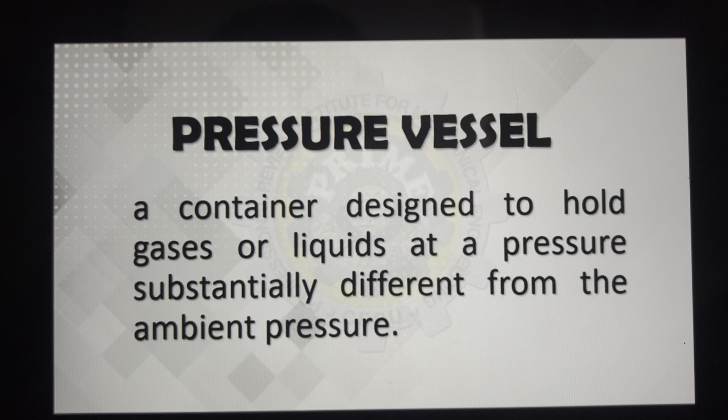Unahin po natin si pressure vessels. When you say pressure vessels, those are containers designed to hold fluids having a pressure substantially different from the ambient. Sa pressure vessel po natin, meron tayong dalawang uri: thin-walled, manipis, at makapal, the thick-walled pressure vessels. Meron po tayong pan-check para masabi natin thin-walled ng ating vessel: the thickness of the vessel with respect to the inside diameter should be less than 0.07. Yan po yung susundin natin.

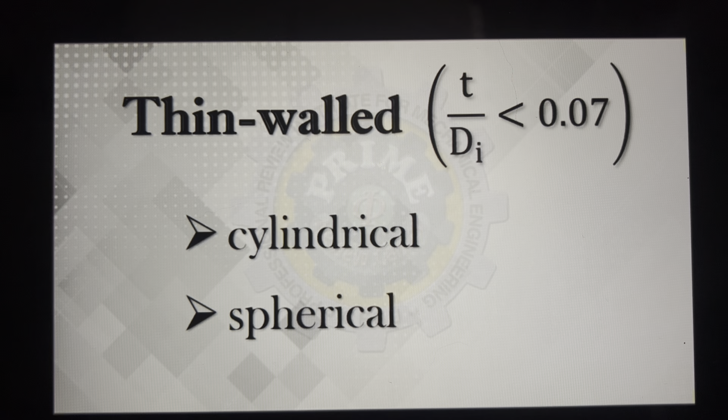Meron tayong dalawang uri ng thin-walled pa: the cylindrical pressure vessel and the spherical thin-walled pressure vessel. Magkaiba po tayo ng formula, so daanan lang po natin yung derivation niya. Mabilisan lang naman po ito.

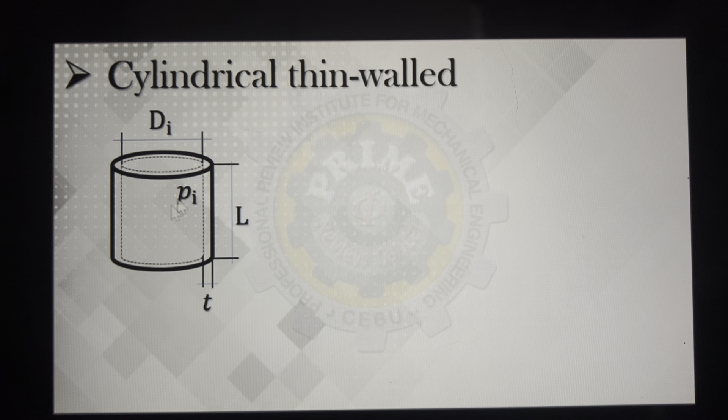Sa cylindrical thin-walled po, for example, this is your cylinder having the thickness, of course. This is the inside diameter, this is the thickness, and this is the height na tatawagin nating length, L. Height or length, taas po. And you have the pressure inside, which is substantially different sa surrounding natin.

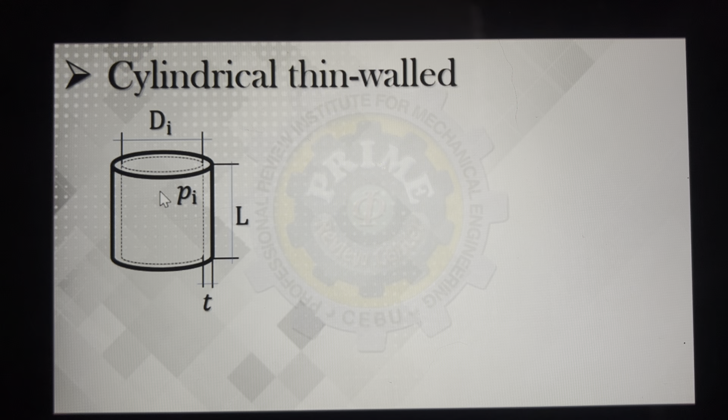Since iba yung pressure natin sa loob, normally malaki kumpara sa labas, ang tendency po ng pressure is kumawala, so possible pong masira yung ating vessel. Imagine this vessel kung mapupunit po siya dito sa kulay blue na line. Meron po tayong stress na nabuo dyan, tawagin nating ST. Ito po yung ating cross-sectional area once na nasira yung ating vessel dahil sa force na tumulak sa kanya.

Sabi natin, stress is force over resisting area, yung pumigil. Sa thermodynamics po, ang pressure naman ay force over area rin, pero ang pinagkaiba lang nila, this is area of application, kung saan tumama yung force. Tumama yung force natin dito sa pakurba, pero medyo mahirap computing yung kurbadang area since lahat naman yan tinatamaan. Ang ginagawa po natin, ipoproject natin yan.

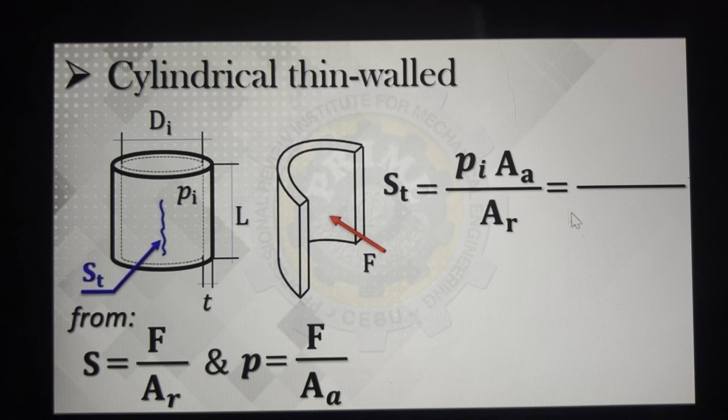Pagsasamahin ko na itong dalawa, stress sub T is equal to force. Galing naman sa pressure, ang force ay inside pressure times area of application over the resisting area. Expand lang natin: you have the inside pressure. Ang area of application, yung tinamaan, ipoproject lang natin siya para maging rectangle, itong blue, so yun po ay magiging inside diameter times the length. And the resisting, yung pumigil para ito ay mapunit, ay ito pong dalawang nasa gilid, ginawa natin green, so yun po ay dalawang thickness times the length.

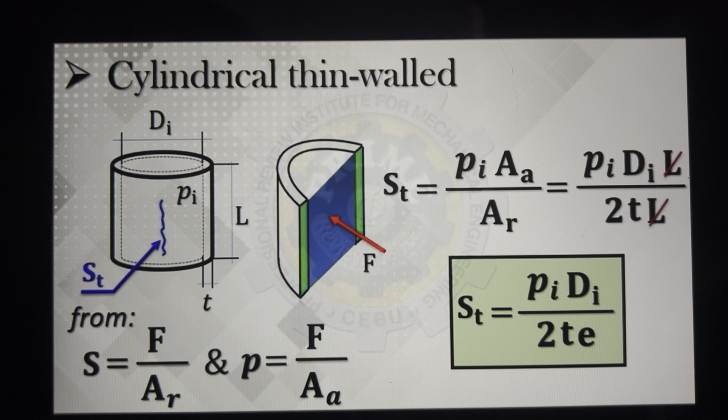Magka-cancel out po yung length. Kaya ang formula ng ST natin is inside pressure times inside diameter over twice of the thickness. Of course, pag may binigay na joint efficiency, divisor po. Pag walang binigay, make it 100%. Sige, so yan po yung formula natin sa ST. Mamaya ko na po sasabihin yung meaning niyan.

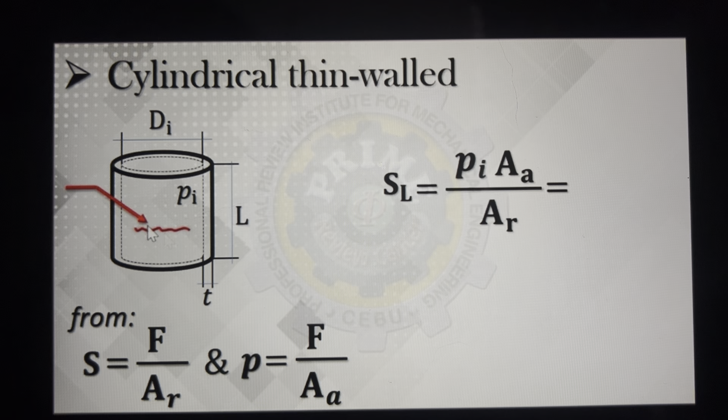Meron din po tayong SL naman. Ano pala yung SL? So ito pala yung formula. Pero yung ating vessel, imagine natin if dito masira naman sa kulay pula na to, ang mababago lang dyan is yung cross-section natin. Ito po yung mangyayari, ito ang ating force.

Siyempre, ang magiging area of application, yung bilog na maliit, so yun ay pi over 4 inside diameter squared. At yung resisting area natin, itong green, pero yung ginagawa dyan, pupunitin mo yan dito, then i-stretch mo, magiging yung green, imagine niyo na in-stretch mo na rectangle. Kaya yun ay perimeter pi d inside times the thickness, yung kapal niyan.

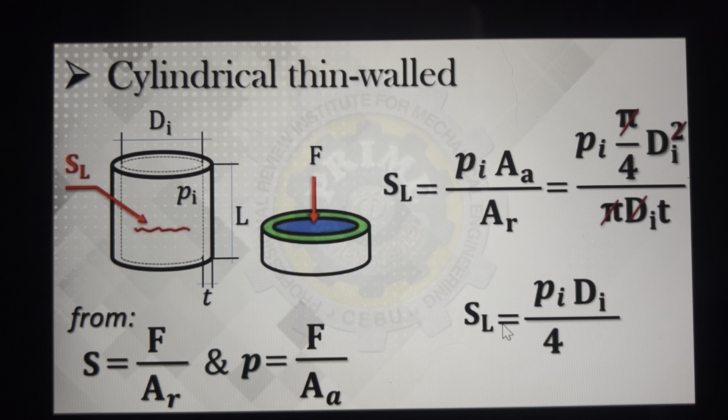Kaya mag-cancel out po ang pi at isang inside diameter, magiging SL is pi di over 4t. Of course, efficiency is divisor.

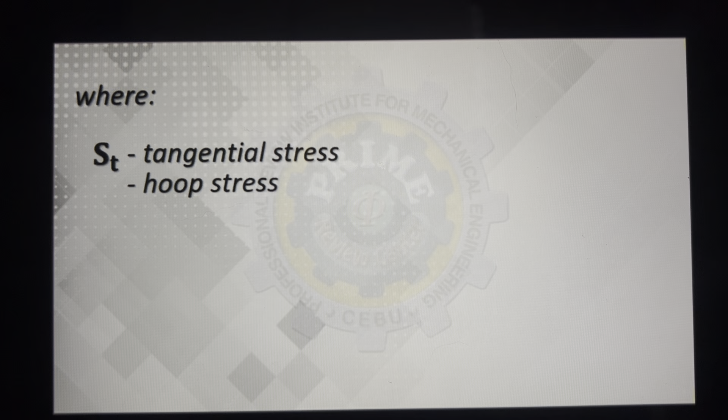Ito po yung mga meaning niya. Pag sinabing ST, yan po yung tangential stress, that is also the hoop stress, the girth, circumferential, the maximum stress, or simply the stress. Yun po ang ating ST na tinatawag. You have SL, which is the longitudinal or the minimum stress.

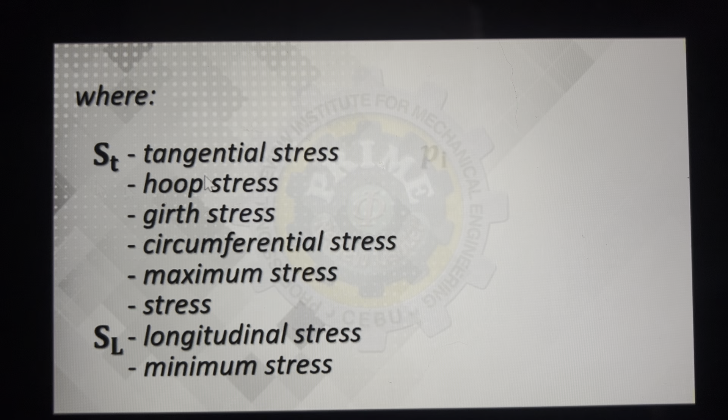Sa mga problems po natin, ang design natin is laging based on the maximum stress, worst case scenario kumbaga. So pag walang tinanong sa problem kung anong tinatanong na stress, that is automatic, di tangential, ST ang kukunin. And of course, you have the inside pressure, the inside diameter. Sa diameter pala, pag walang binanggit about the problem, inside na automatic ang ating assumption. You have the wall thickness, and of course, you have the joint efficiency natin.

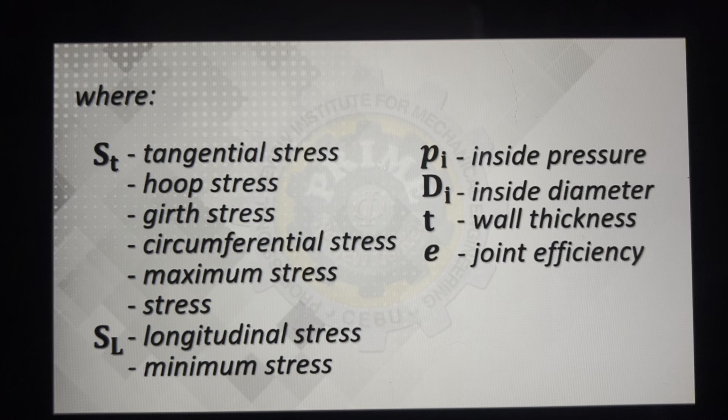Sige, so next natin is spherical naman po.

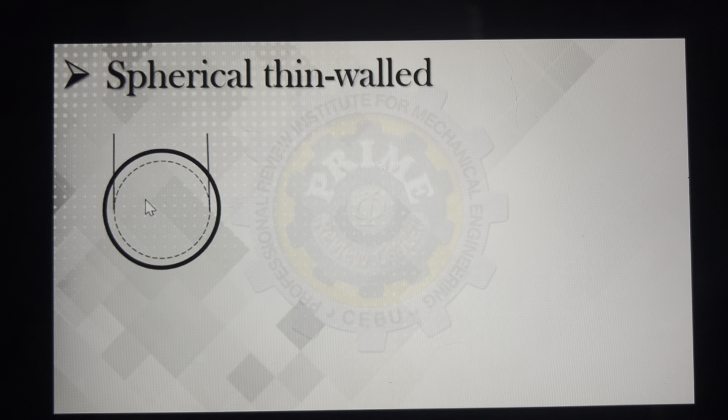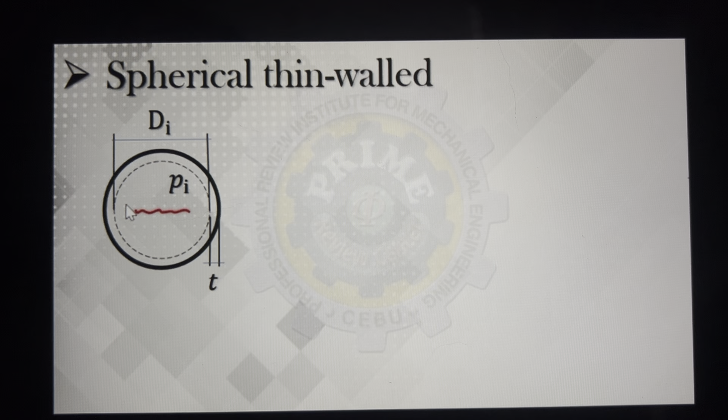Thin walled vessel. So sa sphere natin, ito po yan ay kapal, syempre. So ito yung ating inside diameter, and this is the thickness. Imaginein po natin, due to the pressure inside, possible masira yung tangke. So pumutok, kumbaga, pwedeng sa direction na to. You have your SL, longitudinal, and pwede rin dito sa blue, ST.

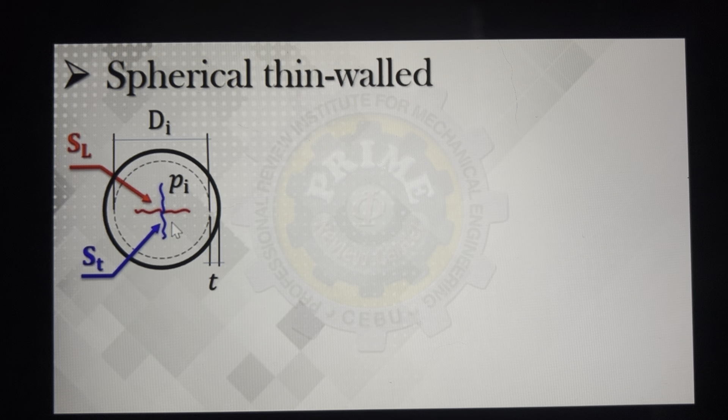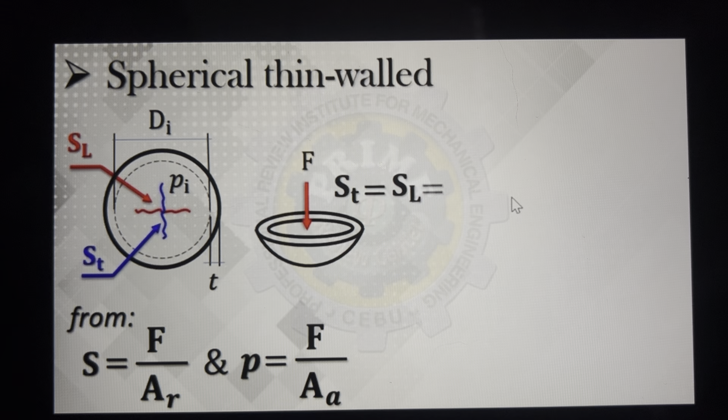Mas mabilis lang yung derivation ng formula sa spherical kasi imagine kung kunin ko yung cross-section dito sa tangential at sa longitudinal, parehas lang kung ganito. So ibig sabihin, from stress again, and pressure formula, nag-come up tayo kanina sa ST, equal ngayon si ST at SL, obvious naman. So sila ay equal sa derivation natin na inside pressure, area of application, over the resisting area.

Ang mababago lang, the area of application ay itong bilog na maliit, kaya pi over 4, Di squared. Ang resisting area itong bilog na may butas na green, pero ang ginawa ulit, kagaya kanina sa cylindrical, hatiin yan, i-stretch, magiging rectangle, so circumference, pi Di times the thickness. Magka-cancel out po yung pi at isang Di, so ang ating stress for spherical is parehas lang sa tangential at longitudinal na PD over 4t, may efficiency denominator.

Pag mas maliit po ang stress, mas malakas yung ating vessel. Kaya mas malakas ang spherical sa cylindrical by twice, kasi ang denominator nito ay 4, ang denominator ng tangential ng cylindrical ay 2. Okay, so let's try this problem.

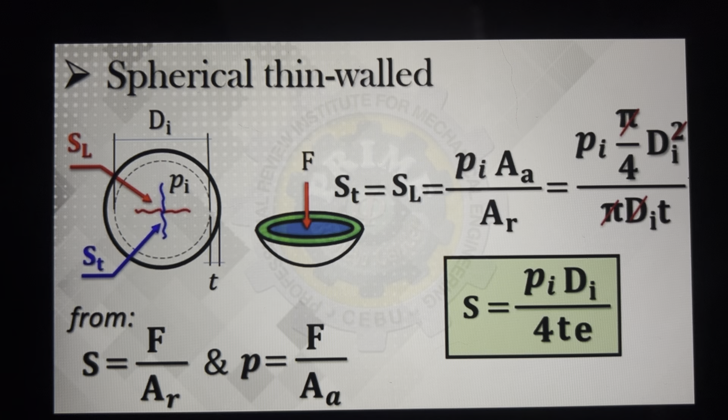A thin-walled cylinder is 15 inches in diameter, having an internal pressure of 150 psi. The wall thickness is 0.125 inch. Find the induced stress.

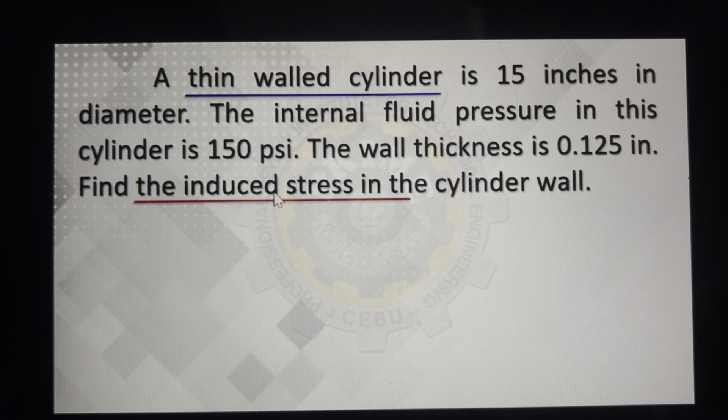Sa thin-walled pressure vessel po, induced stress or simply St is PD over 2te. Direct sub naman ito. So you have your 150 psi, inside diameter is 15 - again, pag walang binanggit sa diameter, automatic inside yan. You have twice of the thickness given. Efficiency, walang sinabi, so that is automatic 100%. Sa design, pag naka-English units, tandaan lang lagi: psi, inches, then pound force.

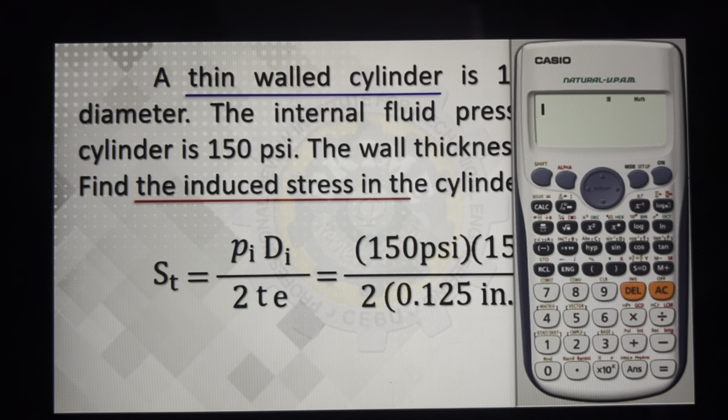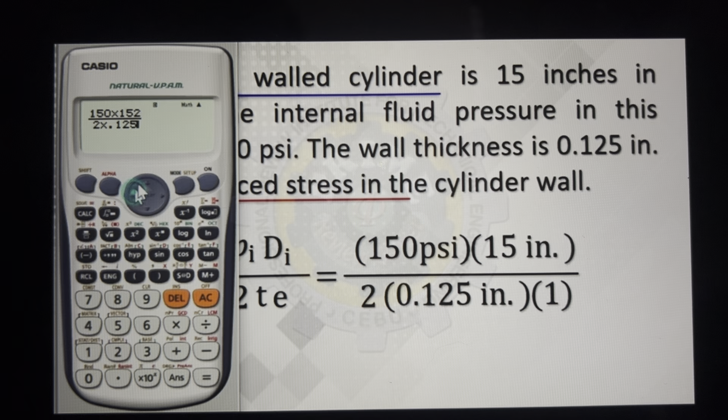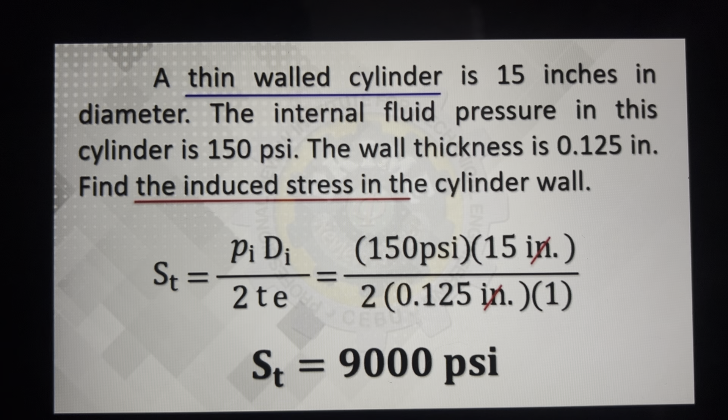Okay, labas lang natin si calcu. Ililipat ko lang dito si calcu. Ito type na natin siya: that is 150 times 15 all over twice of 0.125. Wait lang, may mali tayo na pindot. Okay, 15 lang to. So lalabas po ay 9,000 psi. Ganun lang po kasimple yan, direct sub lang. Okay, next number.

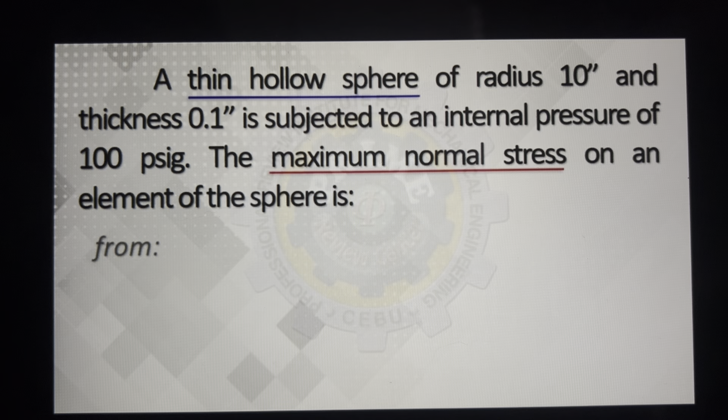A thin hollow sphere, radius 10 - tandaan, sabi dyan radius of 10, walang sinabi, so inside na. Thickness of 0.1 inch is subjected to an internal pressure of 100 psi gauge. What is the maximum stress on the element of the sphere? Pag sphere po, over 4 tayo. Direct sub pa rin yan.

You have your inside pressure of 100 psi. Okay lang kung gauge dahil gauge naman talaga ang nasa loob ng cylinder. You have the diameter, twice of the radius 10, times 2 since this is a hollow sphere. Then thickness is 0.1, efficiency not given, 100%.

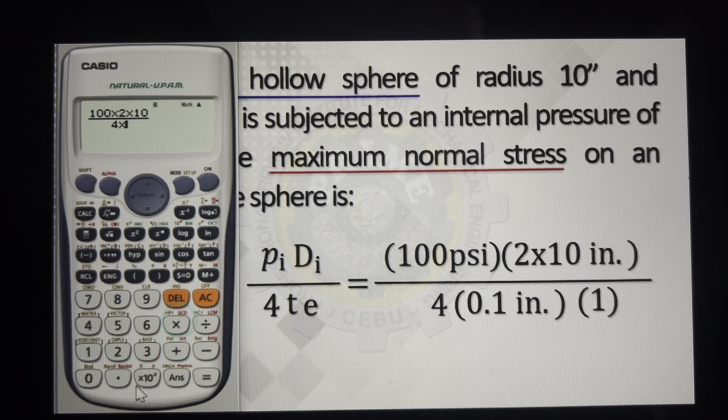Okay, i-type ulit sa calcu natin yan. That is 100 times 2 times 10, pwede yan kay calcu, divided by 4 times 0.1 equals natin 5,000. English unit, psi. Ganun lang po yan. Next.

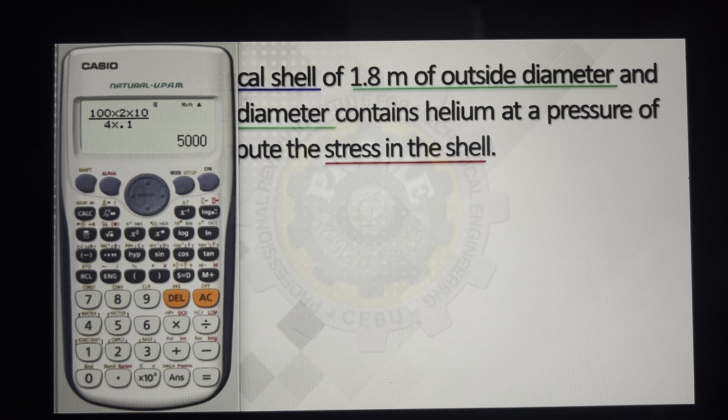Spherical shell, binigyan ka ng dalawang diameters, outside, inside, makukuha natin si thickness. Sa mathematics, ang thickness natin ay - okay, paano ba lumabas yung value na yan? Paano ang solution natin for thickness? Kung naalala pa sa math, sir, yun po ay difference in diameters, 1.8 minus 1.725, i-divide mo ng 2. Doon po nanggaling ang 0.0375, that is in meters.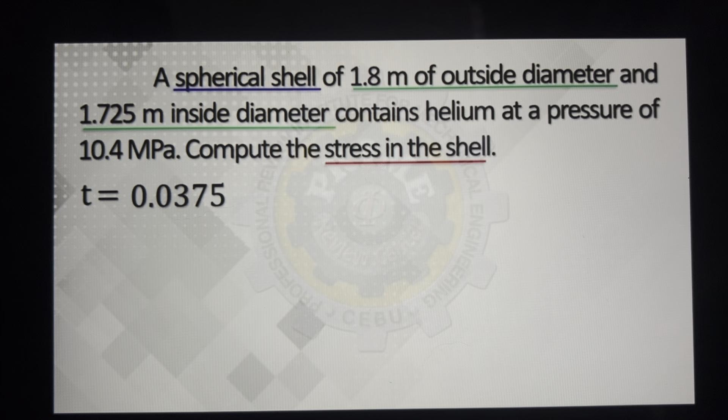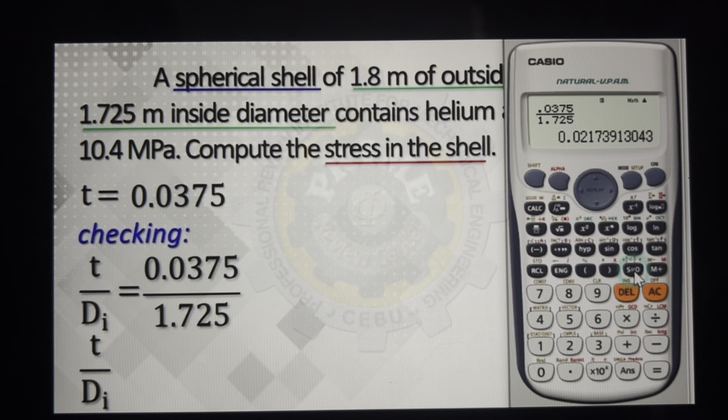Walang sinabi ditong thin or thick, so pwede natin ma-check agad using thickness over the inside diameter. Ito type natin yan: 0.0375 over the inside diameter 1.725, ang lumabas dun ay 0.02. Okay, so 0.02 is less than 0.07, so thin walled yan. Lagi po nating i-check pag walang sinabi sa problem. So thin walled pressure vessel, cylindrical, spherical, kaya over 4, direct sub yan.

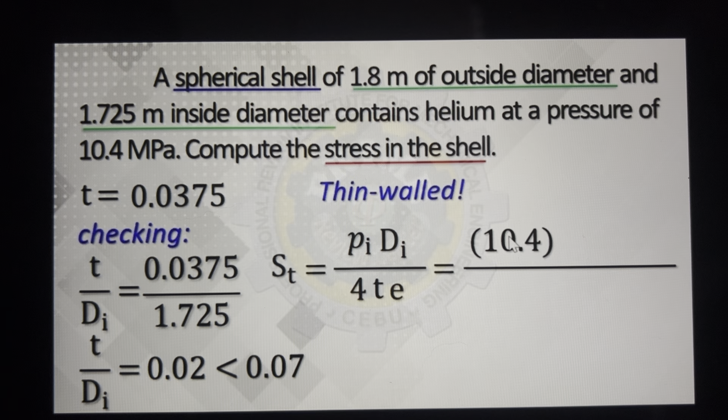SI units tayo. Sa SI units, megapascal at saka millimeter sana, pero dito naman okay lang na meters kasi magka-cancel out yung unit ng diameter at thickness, same ng unit ng stress at pressure. Lagi pong ganun yun. So efficiency, again, 100% since hindi binigay. Ito type na lang natin to.

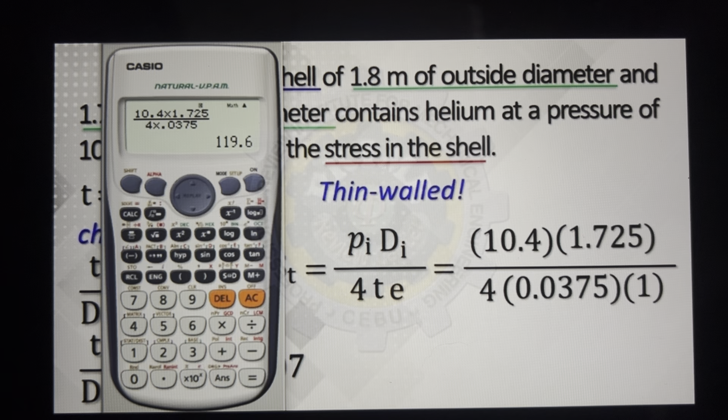That is 10.4 times 1.725, divided by 4 times 0.0375 - huwag na ilagay ang times 1. Equals natin yung 119.6, again the unit is megapascal. Ganun lang po ang pagsosolve ng pressure vessel na thin wall.